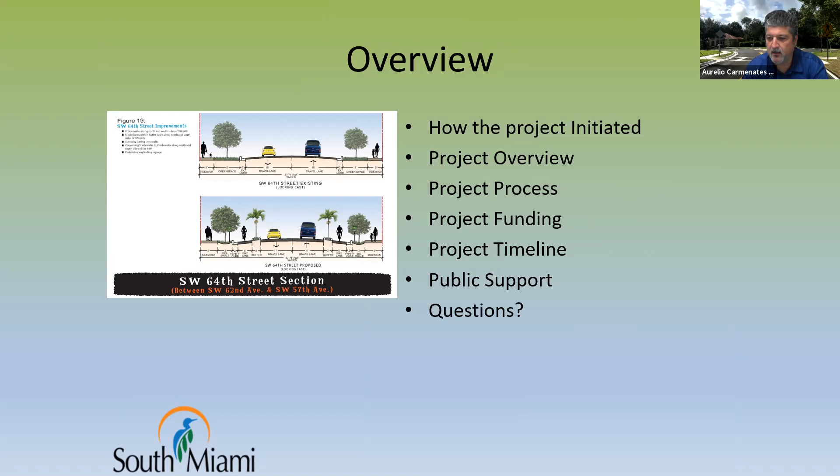To give you an overview, I'm going to go over how the project got initiated, the project overview, the process, the funding, the project timeline, the public support, and then at the end I'll take any questions.

Initially, the City of South Miami decided to enhance the existing transportation system and mobility choices available to residents, workers, and visitors to the city.

In 2012, the City Commission approved funding from PTP to create the South Miami Intermodal Transportation Plan. In 2013, the City of South Miami was awarded a grant from the MPO. And in January 2015, the City of South Miami completed the South Miami Intermodal Transportation Plan.

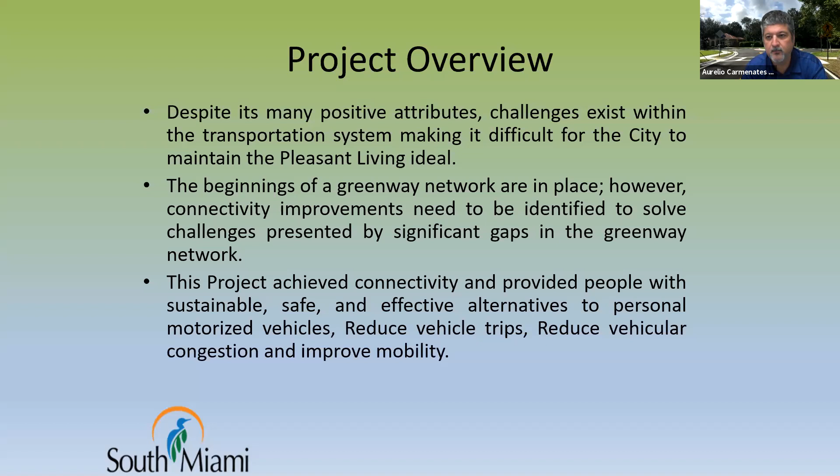In an effort to enhance the existing transportation system, despite its many positive attributes, challenges existed that made it difficult for the city to maintain the pleasant living ideal. So the city embarked on the beginning of a Greenway network where connectivity improvements needed to be identified to solve challenges presented by significant gaps in the Greenway network. The project achieved connectivity and provided people with a sustainable, safe, and effective alternative to personal motorized vehicles. It reduced vehicle trips, reduced vehicle congestion, and improved mobility.

The process required coordination and reviews by Miami-Dade County Department of Transportation and Public Works. The City of South Miami executed a covenant with Miami-Dade County for maintenance of the improvements, and an interlocal agreement was modified to include bike sharrows, which are an integral part and were included as part of the project. Construction of the project was completed on February 17th, 2021.

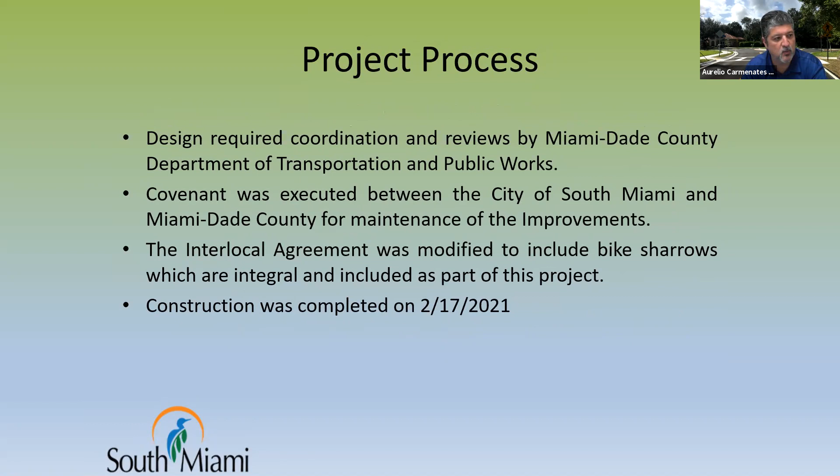As I mentioned before, the City Commission approved in 2012 and received PTP funds for the South Miami Intermodal Transportation Plan, which then started and was completed in 2015. The city spent $178,000 for design and to develop construction drawings based on the findings of the South Miami Intermodal Transportation Plan. The city received funding participation in the amount of $60,000 from Miami-Dade County Public Housing Community Development Block Grant for the design.

The city received $294,916 from the Miami-Dade County Public Housing Community Development Block Grant for construction. In addition, the City of South Miami received and spent from the People's Transportation Tax funding the amount of $103,541.

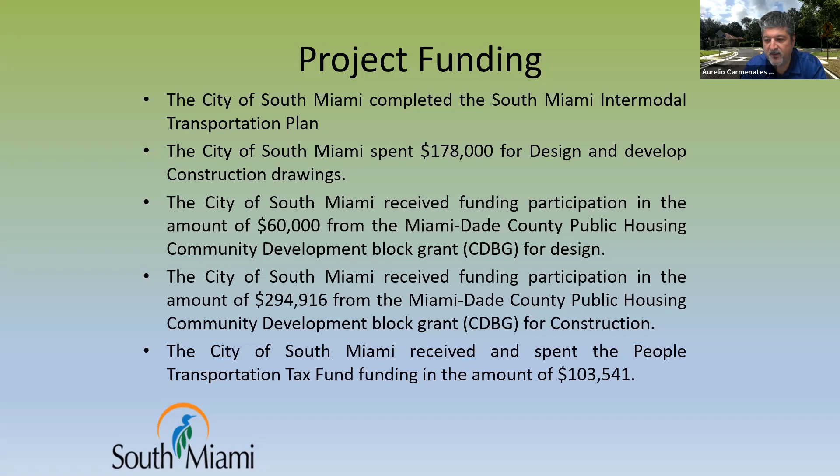The project timeline started on May 17, 2017. The design and permitting lasted all the way up to April 29, 2020, when final construction drawings were developed. The construction bid package was prepared in May, and the project was advertised in June of 2020. The construction was awarded in August 2020, and construction finalized on February 17, 2021.

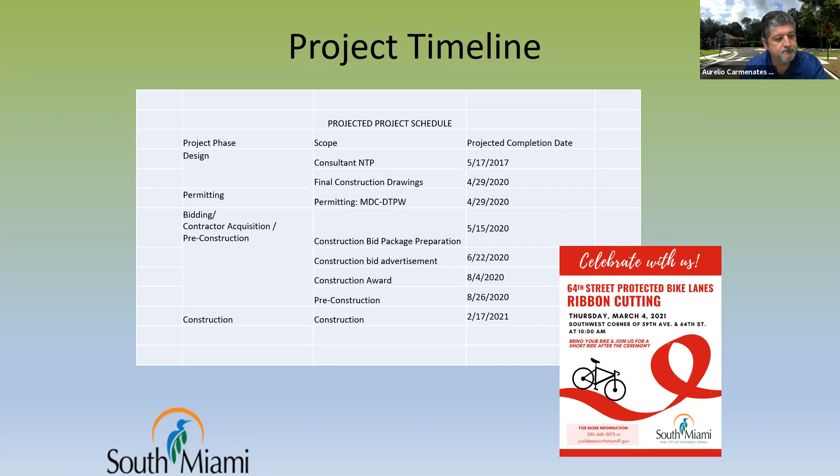Next slide. I included the schedule of values for the project in the amount of $398,457 for the work that was completed, which included the new dedicated bike lane. There were concrete curbs that were added, and all the pavement markings for the dedicated bike lane.

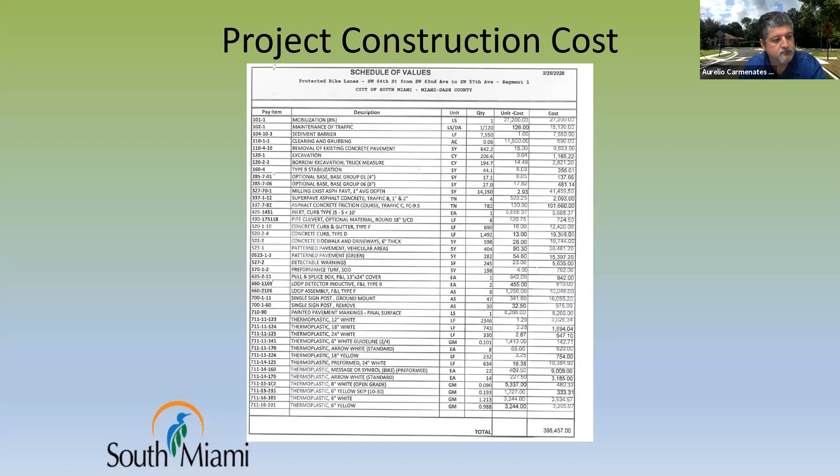The next slide, which I think is pretty much the end of the presentation, and if there are any questions, I'll be happy to answer them.

Hello, Eric Tolberg, sole member here. Did Kevin Wolford pass on to you my email with some of my comments? I did not see that email. I do not believe I passed that on, Eric. Oh, okay, fine. Well, I'll just kind of read from it.

I would like you to have... I've got a graphic that shows why the bike lanes are great, but they need to be extended.

First, I see that you did not put protected bike lanes from 59th Court to 60th Avenue. Was there just not enough right of way in that area? That's correct.

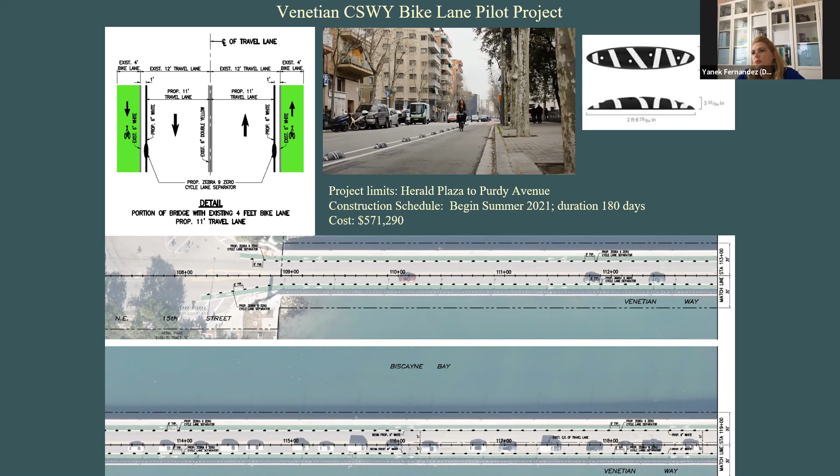Okay, this is just another view of the Venetian, but basically it's the same thing. On the bridges where you have the 12-foot lanes, they're going to be reduced to 11 feet, and a 6-inch white line is going to be added. On top of that, you're going to have the zebras.

If the project is a very simple project in terms that you don't have any reconstruction, you don't have any drainage, it's very simply just sign and pavement marking and the installation of these features. If you have any questions, I think Eric, you had some that you had sent to us. Do you want to bring them up now?

Hello. Yes, I was just concerned that they might have a cyclist fall and therefore be a danger. Is there any history of these being put in, and have they had any problems with that, of a cyclist hitting them and falling over?

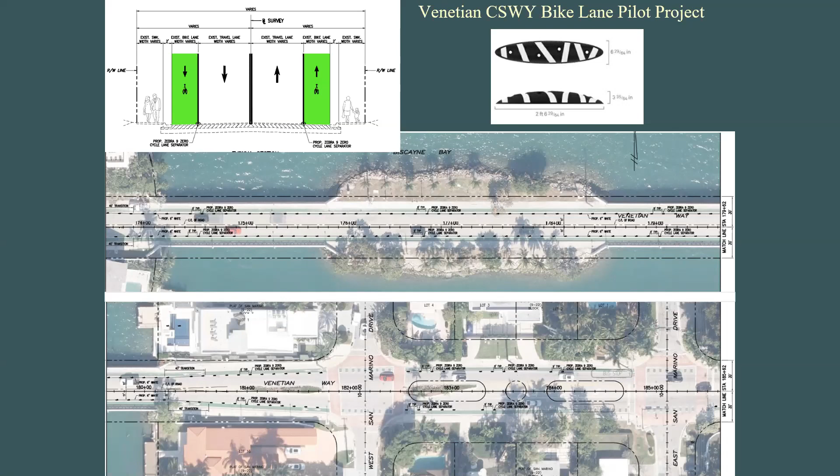This is Eric. I have a suggestion. When this project is complete, I think you should have a meeting with motorists, cyclists, and runners, and try to get everybody there and really stress how you have to be courteous of other road users. And in this case, it might be life-saving.

When you roll out the project, it would be great if you could have a meeting where you have the drivers, the runners, and the cyclists all there, and stress that we all have to get along to be safe and look out for other people. But you know that only the people that care are going to be at the meetings. The people that are dangerous aren't going to be there.

This is actually a question for parts. Lynn, are you there? Yes, I'm here. Is this project going to have a public meeting or meeting with the association along Venetian Causeway prior to implementation? I thought we had a meeting last time with the bicycle community and the commissioner. That was our meeting. I don't think we are proposing any other meetings.

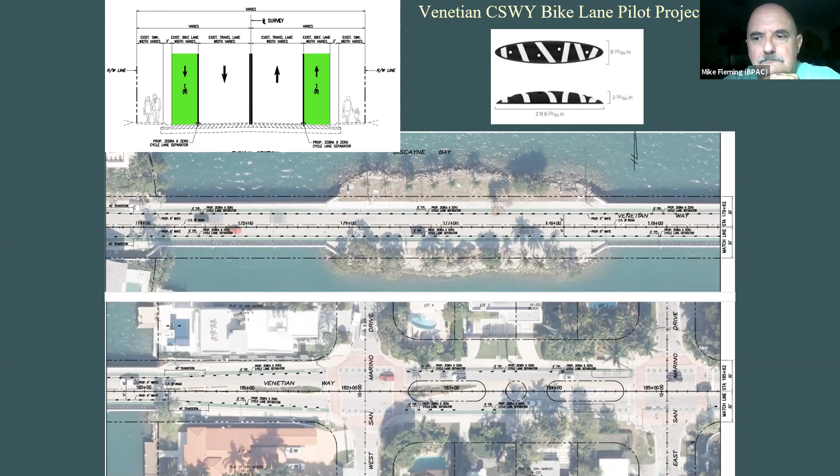This application, we were not able to place them diagonally because there is no space. If you place them diagonally, you'd be taking additional space either from the vehicle lane or the bike lane. So in an extremely constrained location such as this one, I think this is the best approach. When I've talked to central office and also about Meridian Avenue, the ones they installed at the entrance of the bike facilities, where they start, they put a tubular marker to add that vertical element, just one tubular marker.

Might be something to consider, Yannick, just at the entrance when it begins, to add a vertical element, bringing awareness to the vehicles getting onto the facility to alert them that hey, there's a separated bike facility.

That's something to consider. I know that on the west side they begin at a buffer space, so it's not that close to the vehicle lane. You do have a buffer space, but that's something that can be considered. And it's pretty easy to implement too, with about the same footprint. The tubular markers have about a 7-inch base, so it's not much different than the 6.5.

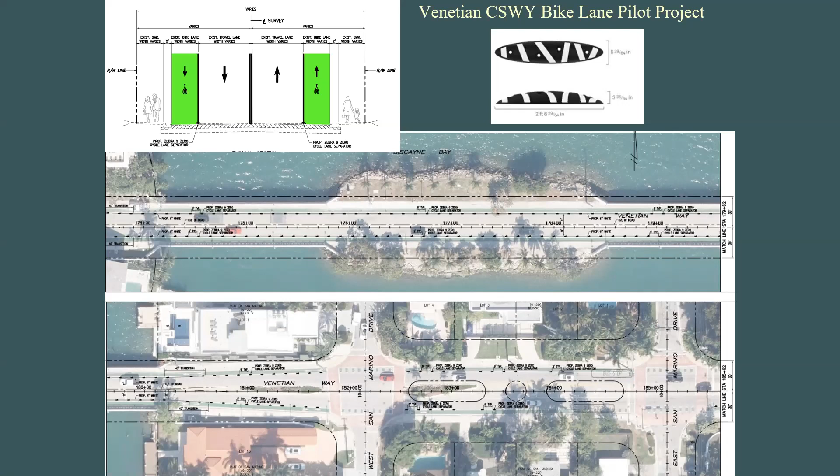Okay, I'll look into that. If no further questions, then Kevin, can you please move to the next slide? Thank you.

This is another project that began as a pilot project. It was implemented by the county at Northeast 2nd Street and First Avenue. This is a sample of a Scramble Crosswalk, at the intersection one block south of Miami-Dade College. The project was completed last year in December 2020, and the construction cost was pretty small considering the typical cost for an intersection roadway project. This is because we utilized existing equipment and just added additional features needed for the implementation of a Scramble Crosswalk. Basically, what was added was the diagonal pedestrian signals.

Let me backtrack for a second. Scramble crosswalks are basically crosswalks where you have an exclusive pedestrian phase for pedestrians. In other words, you stop all traffic so that pedestrians can cross the intersection. But in addition, they can cross either diagonally or perpendicular. One further restriction is that you have to restrict right turning movements. In other words, no turn on red needs to be implemented, so there is no confusion with a vehicle making a right turn and someone coming diagonally.

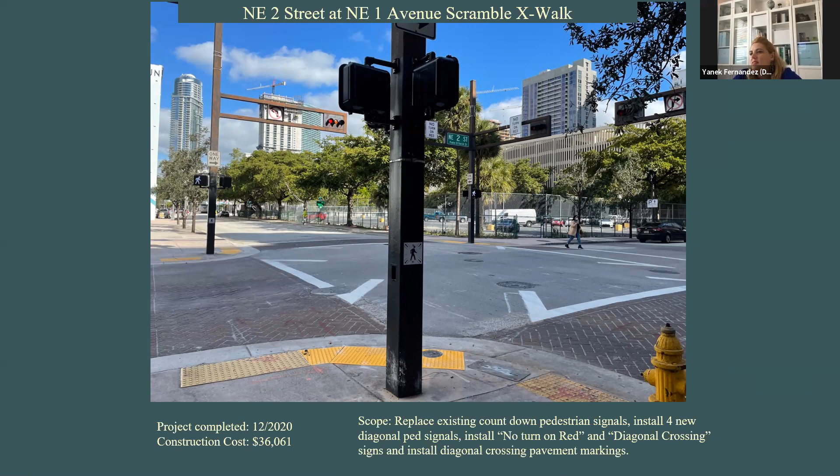The next one, I'm pretty sure Eric is going to be very excited to look at - the Old Cutler trail on 67th Avenue, actually the roundabout. Here, the Old Cutler trail connects to the 136th Street Trail. You can see it on the south side, and the crossing is being done through the south side all the way to the Old Cutler Trail.

Go ahead, Mike. The bike trail, I see the Old Cutler Trail. That's good, now I see the trail on the opposite side. That's very important, because the bike trail swaps sides at the very next intersection - it goes from being on the right to being on the left.

So is this indicating there's a sidewalk or trail on the other side of the road too? It doesn't look like it - what you have on the north side is a regular sidewalk. Let me break in here - on the other side, right now, there is just a single 5-foot straight sidewalk.

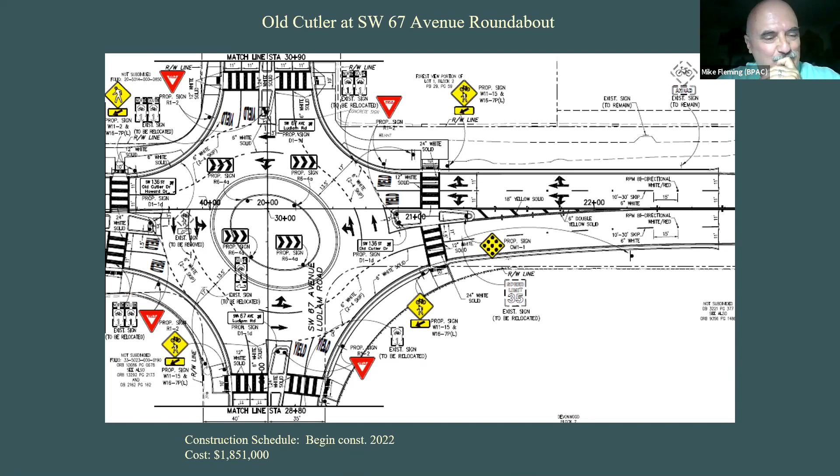This is going to be two traffic circles about 20 yards apart from each other. This is just going to be a nightmare. Actually, it's 450 feet. Is it that far? Wow, it doesn't seem like it. Well, traffic circles do show to slow vehicles down, and 450 feet is a good distance to maintain that slow traffic. So you're right. I'm looking forward to seeing its implementation and hopefully an evaluation of how it's impacting traffic speeds.

One of my suggestions for the other circle was to make it rounder and less elliptical. That might get you the 5 feet that you need on the north side.

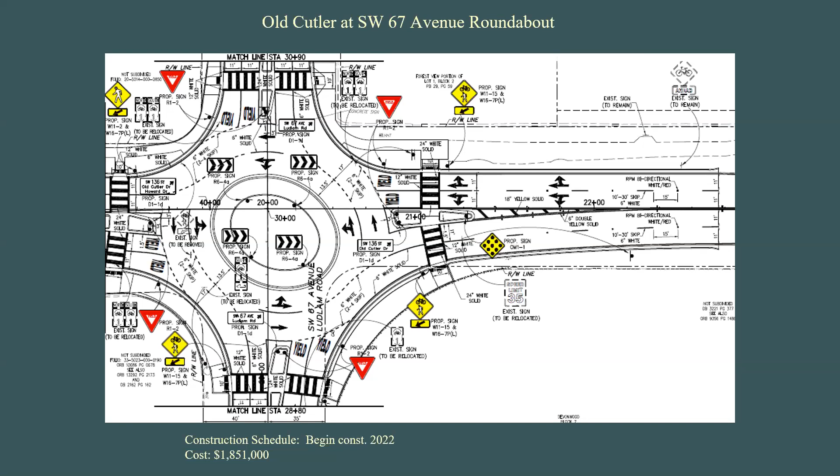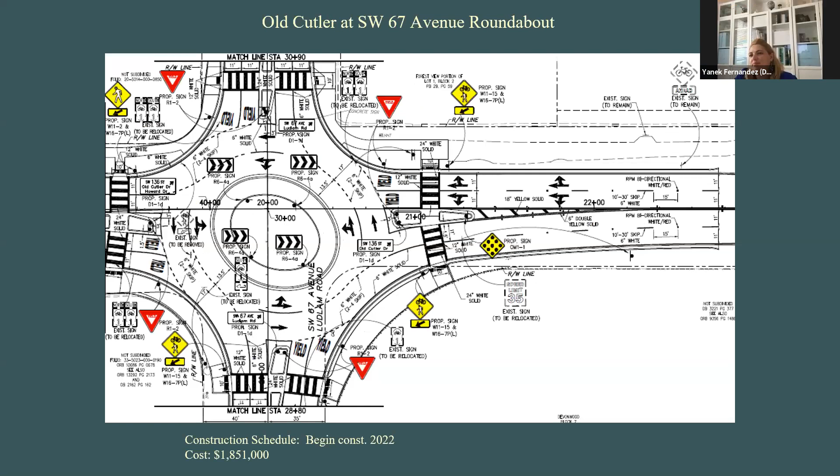Kevin, can you go back for a second? Actually, Lisa's in control of that, but go ahead back, Lisa. Oh, I'm sorry, Lisa. No problem. And Yannick, just so I know, because I'm looking at the clock, how many more slides do you have after this one? Just that one, I'm done here. All right, go back. There we go.

Yes, Eric, that is a good suggestion, but just keep in mind that they have to meet certain deflections for the roundabouts in order to reduce the speed, which is the number one point that they have to address through a roundabout. They cannot allow high speeds through here. So if they're not able to achieve the deflection, then this roundabout doesn't work.

I'll definitely pass on your comments to them and let you know what type of responses I get. Well, there are some things you can do without widening the path at that pinch point. You can first widen the path other places further to the east, but just making a triangle at the corner there so you don't have to make a 90-degree bend would make all the difference. So I'll take a 5-foot sidewalk if I can navigate along it with a bike.

That is one thing that I told them to do: don't do those 90-degree junctions on the sidewalks. Do a chamfer in case someone wanted to turn with a bicycle.

It's a relatively cheap and easy thing to do, and I would hope that the sidewalk plans would follow that. Also, you get a lot of erosion a lot of times in those tight corners, which can create a small drop-off for wheelchair users too, and also cyclists. So it's smart to put a little wedge there. We're not West Point cadets.

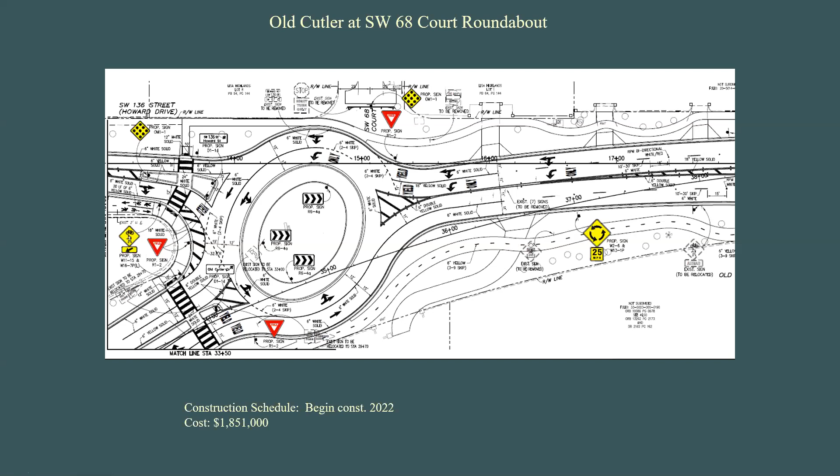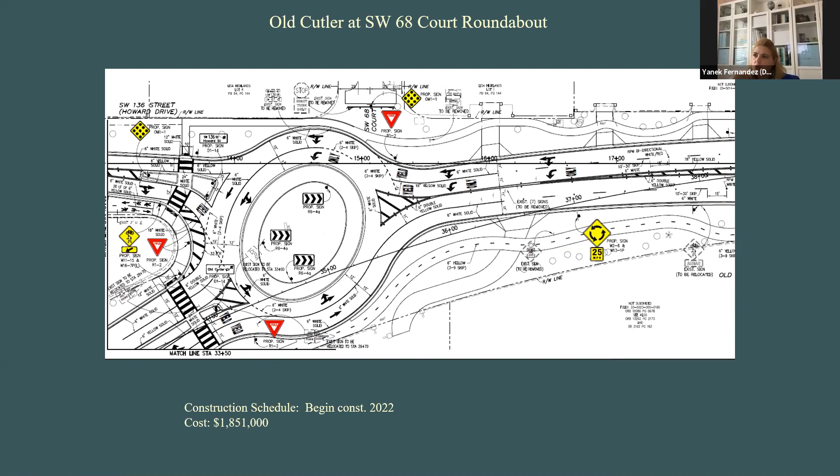Is that trees behind that? Yeah, those should be trees. However, I will send those comments — they have to make sure there's enough visibility to the sidewalk on the path. I will bring that up with them. That's it. Okay, you might want to install a look sign.

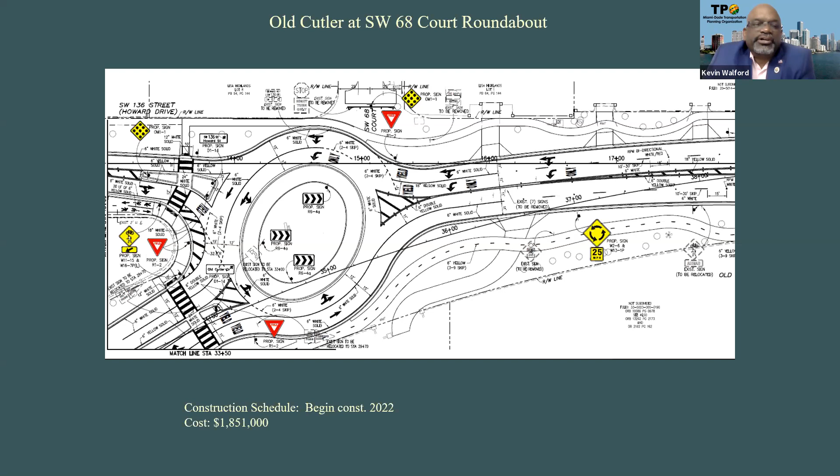Right to the next slide, Lisa. Those are the projects that DTPW has right now. Any questions, feel free to contact me. And that concludes my presentation.

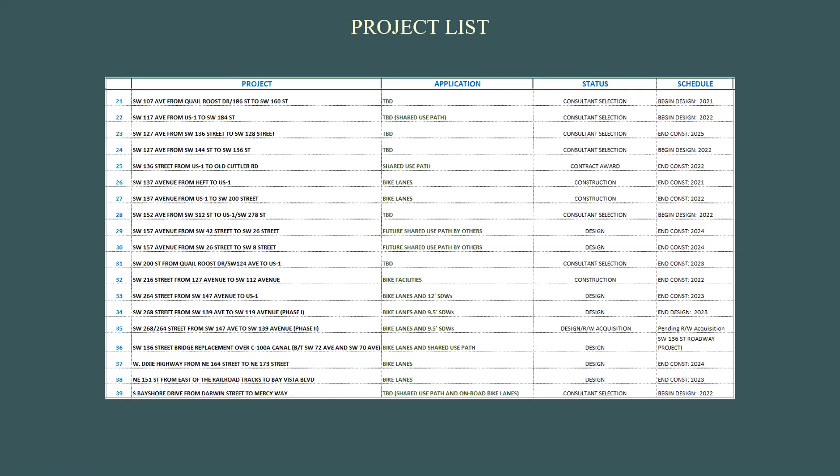Thank you. Okay, I commented on all 39 projects. You have my email, if anything comes up let me know. Will do — I already started forwarding them to the corresponding project managers. As soon as I get a response from them, I'll send them your way.

Yes, I'm particularly interested in when the path on 136th Street is going to start. I had heard it was going to be in March, and then later, now it's supposedly in the summer — but whenever it's going to start, please let me know. Will do. Thank you. All right, thank you very much, Yanek. Tiffany, you're up.

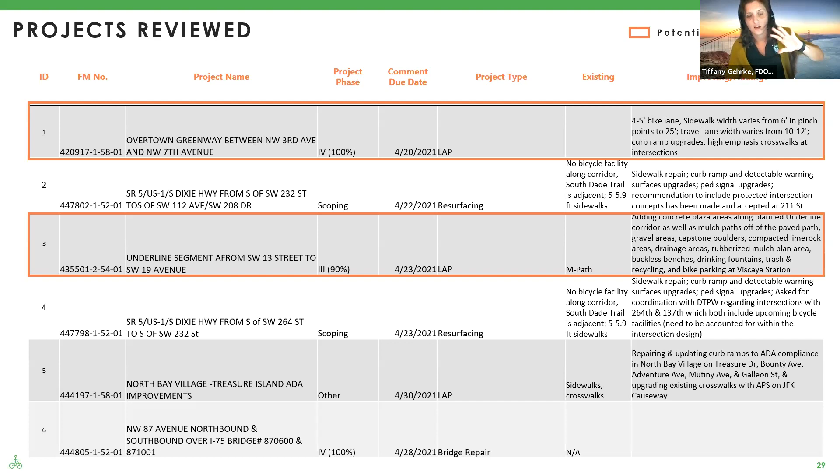So I'm very excited because that's the juxtaposition of where the Black Creek Trail and the protected bike lanes on 211th combine with the South Dade Trail and also the trail that's coming in that PROS is overseeing. So many vital things are happening at 211th. So if we could do a protected intersection, I'm going to continue to fight for that.

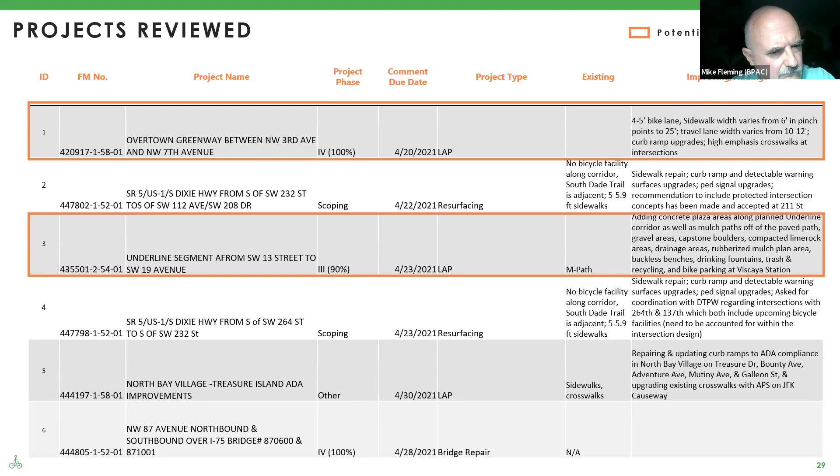And then the underline, the plans for this, just to let everyone know, were for the plaza areas. So this wasn't necessarily the review period that included the amenities, or well, I guess some amenities, but didn't really include the details on the plan of the trail itself. It was more talking about the plaza areas and what type of conditions are going to be there, like concrete plaza, or capstone boulders, gravel areas, compact lime rock, drainage areas. So that's what these plans specifically were for.

And then the next one is another scoping report, from south of Southwest 264th Street to south of Southwest 232nd Street. Again, I know that DTPW has a couple projects coming up with 264th and 137th. So I've asked for them to coordinate with DTPW so that the bike infrastructure going through those intersections is accommodated. Hopefully we'll see some coordination between the project manager of this project and the project manager within DTPW on those projects.

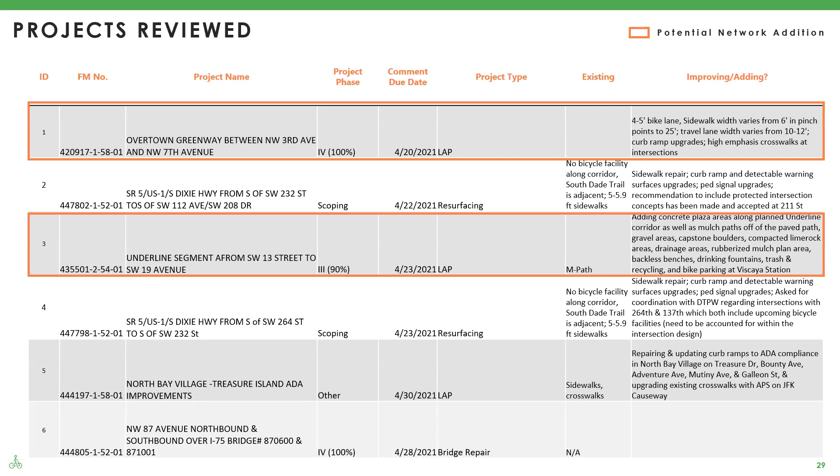And then, 216th Street is under construction now, having bike lanes from 112th Avenue to 127th Avenue, so it'll go through that northern portion. Okay, the other one, item number 2, right? Yes, okay, I'll make sure to add that too. I'll reach out to Calvin and let him know to incorporate that as well.

Okay, and then North Bay Village, this is the Treasure Island ADA improvements. Now, what they're doing here is repairing and updating curb ramps to ADA compliance in North Bay Village on Treasure Drive, Bounty Ave, Adventure Ave, Mutiny Ave, and Galleon Street. And they're upgrading the existing crosswalks with the APS, the accessible pedestrian signal, on JFK Causeway. So a lot of ADA improvements.

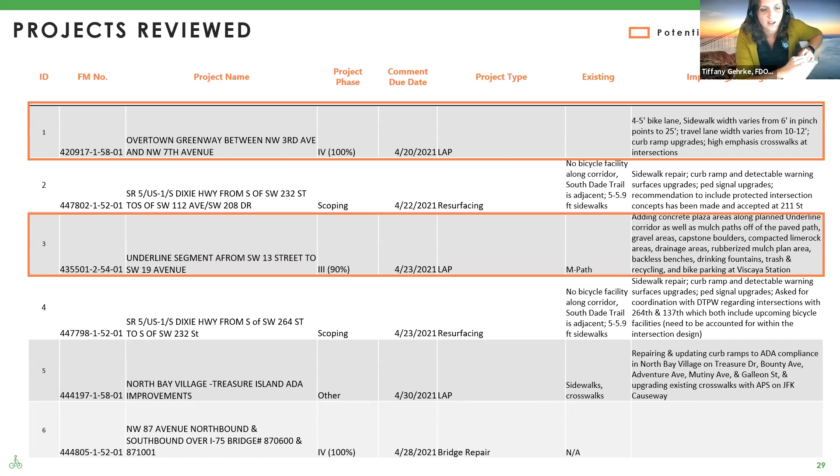Okay, and the last one on this page is the Northwest 87th Avenue northbound and southbound over I-75 bridge, and this is just bridge repair. We'll go to the next slide. So no improvements on our behalf on that, unfortunately.

And then the town of Medley, this is the sidewalk master plan. Now, no details were provided at this point because this is just the request for qualifications review. We just make sure that they're following our process when they're requesting for qualifications.

So North Bay Village, this is the Baywalk Plaza area. I'll show you images in a little bit.

And then the next one is the city of Miami, the Miami River Greenway, Curtis Park East. It's going to have 10-foot concrete sidewalks on the south side of Northwest North River Drive, connecting to the park to both the east and the west. It's also going to have 5 to 7.5 foot sidewalks north of Northwest North River Drive and 13-foot sidewalks on the west side of Northwest 24th Ave, and 10-foot minimum sidewalks east of Curtis Park and west of Miami River. I'll show you that in the images later, I know I've got an image coming on.

And then the next one is just a resurfacing of the ramps here, which does not impact bike or pedestrian infrastructure facilities. And this one is that same bridge, the Tamiami project that all of you are aware of, presented multiple times, on that wetland restoration project. And then this one is State Road 934.

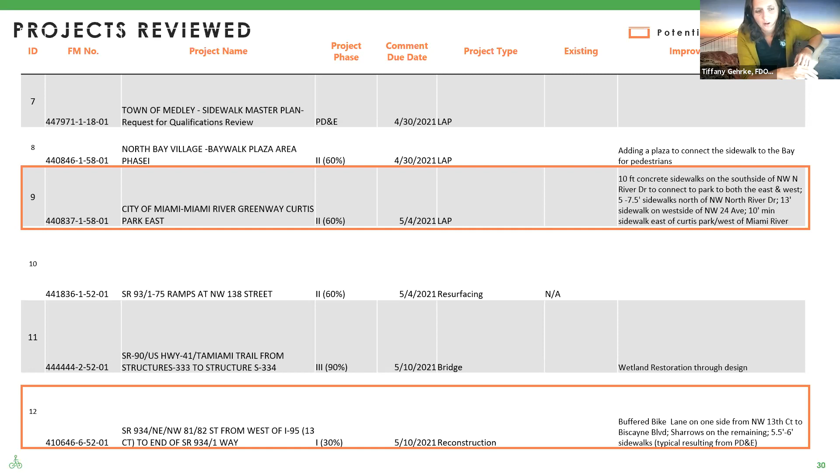This project went through PD&E, so we can go to the next slide since the other piece did go through a project development and environmental process with a lot of public engagement. These were the agreed upon typical sections, the preferred alternative for this corridor, for both number 12 and number 13. What you're seeing here is the 5.5 foot to 10 foot side.

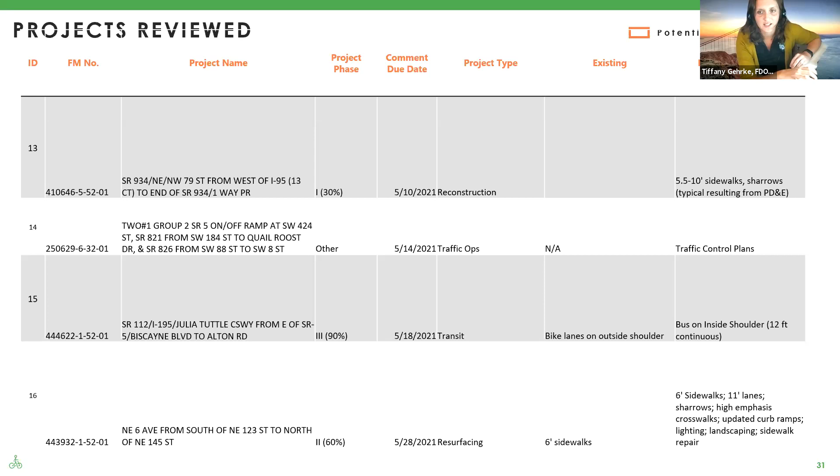Uh-oh, I think Tiffany just froze up. Can you hear me? Yeah, you froze up. Okay, at least... oh wait a second. Yeah, your camera's frozen, okay, but you're talking so keep going. Okay, so I'll just keep talking, I guess.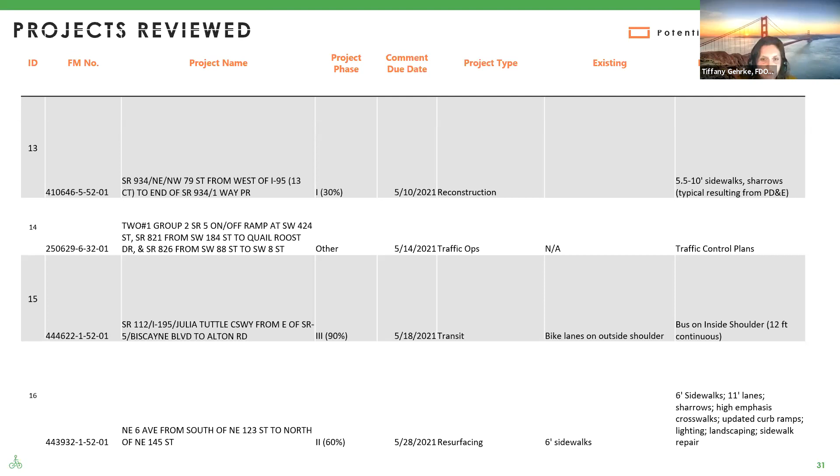Number 12 and number 13 resulted from the project development and environmental process. Traffic Ops has a project doing traffic control plans, supplementing another project. These were just traffic control plans that came through the office for number 14.

Number 15 is the bus on shoulder project, that's on Julia Tuttle, which we've looked at quite a few times. This will eliminate the bike lanes on the outside shoulder. In the next couple of years, the first part will eliminate the bike lanes on the outside shoulder and move the bus to the inside shoulder. It will then free up the outside shoulders again, but we'll have to reapply to use that for bike facilities again, so that's up in the air as to whether we can get that done.

Number 16 is Northeast 6th Avenue from south of Northeast 123rd Street to north of Northeast 145th Street. This will have 6-foot sidewalks, 11-foot lanes, sharrows, high emphasis crosswalks, updated curb ramps, lighting, landscaping, and sidewalk repair. This is a resurfacing project, what we call a triple R project, intended to maintain pavement conditions.

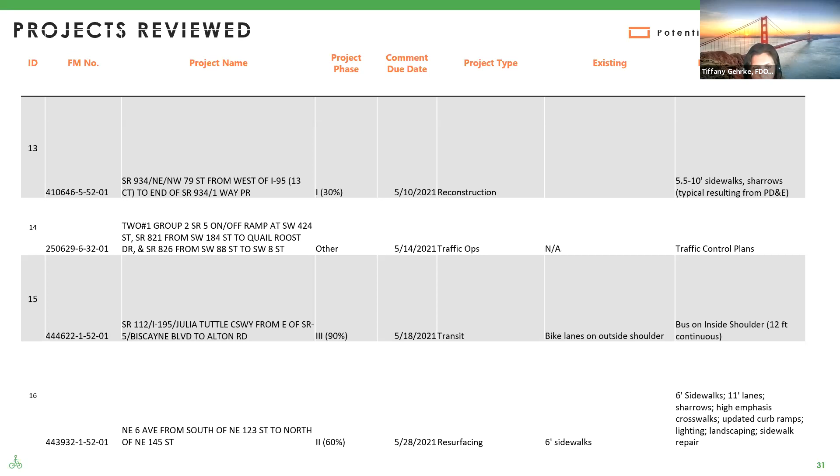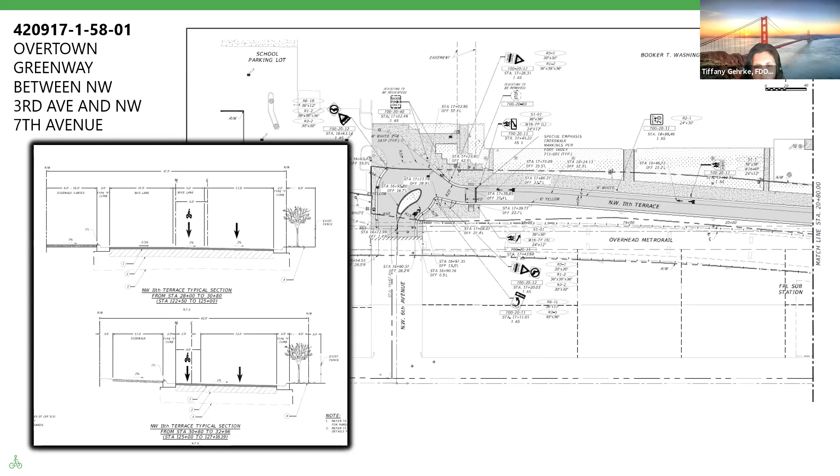One thing that's critical is whenever you have a water fountain, you've got to have a bike rack or something to lean your bikes against. I've been pushing that with Irene - any time we have spaces for gathering, if you have seating, I've been pushing this, but ultimately it's not my decision. I have made that comment; I actually attended a meeting where I made that comment multiple times, that they need bike racks to accommodate the people attracted to those spaces.

So I will continue to make that comment, but ultimately it's not my decision for this project. Did you get the 100% drawings? I got them from Mark - they're supposed to be uploading them soon for our review, so hopefully I'll get those soon.

Mark, could you help her out there? Yeah, they're uploaded, they're there. Oh, they are in ERC? Yes, okay good. I thought I saw an email come through recently saying they should be up soon, but I wasn't able to check. I will look.

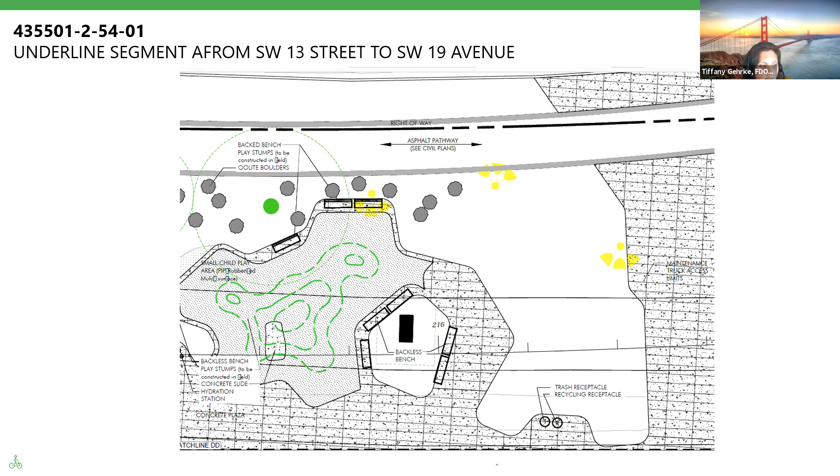Yes, it's not only wheelchairs, but also personal mobility scooters, strollers, bikes for babies, bicycles—there's all kinds of people that go on wheels. So it's not just ADA, it's for everybody else as well. I always tell people that if we're making ADA improvements, we're making improvements for a lot more people than just ADA.

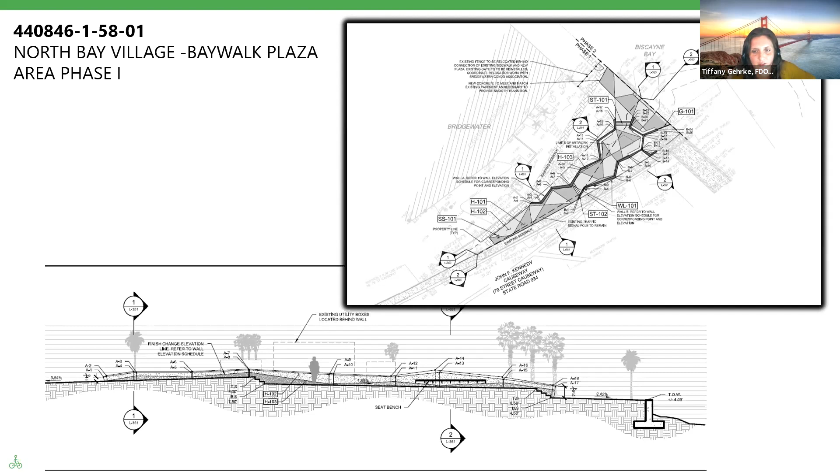Wide enough for there to be a ramp next to the stairs? I'm going to look at the comments a consultant of mine made on behalf of this project. He usually makes about 100 comments for some of these projects, so I kind of feel bad, but he really goes in detail. I'll look over his recommendations to accommodate wheelchairs, and if he for some reason didn't address it, I'll make sure to have a meeting with them separately or send an email.

And this is another City of Miami project. If only Colin was here. Or Brett. Oh, that's true, Brett—this is his baby. He probably would be able to tell you everything about it.

All right, next slide. Are there bike lanes that tie into it? I believe so, but I'll have to confirm that—I can't remember right off the top of my head. It's been a week and a half since I made this presentation, so I'll have to look back and recall if bike lanes were part of this project. Typically, the Miami River Greenway does not use bike lanes; they're pedestrian paths primarily, and I don't think there are any bike lanes in the area. I believe there was one segment that did include, or maybe it was in an application, bike lanes as well as the trail itself, so I'll have to confirm that marked bike facilities were not included within the limits of this project.

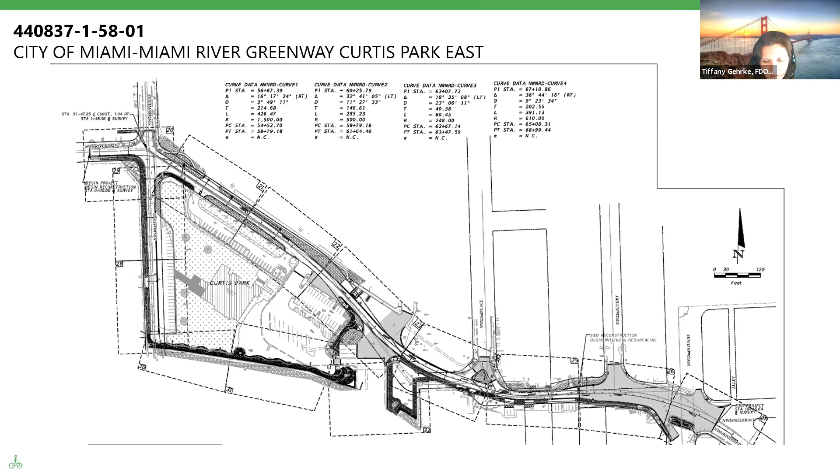That's the intention of the Miami River Greenway, to connect all the way from downtown up north along Okeechobee. Looking into the future image on the screen, there's a gap, or it looks like the east half is not connecting to the west half. I think the image portrays that, but I believe it's supposed to connect. I'll send the plans and confirm that, but I'm thinking maybe it's just the picture quality here. We'll go to the next slide and I'll confirm.

I pointed out that a one-way bicycle facility is not very useful unless there is another one on another road, and there isn't. In this case, I would prefer that space for the bike lane be put into the sidewalks and make a slower but safer bicycle pedestrian facility.

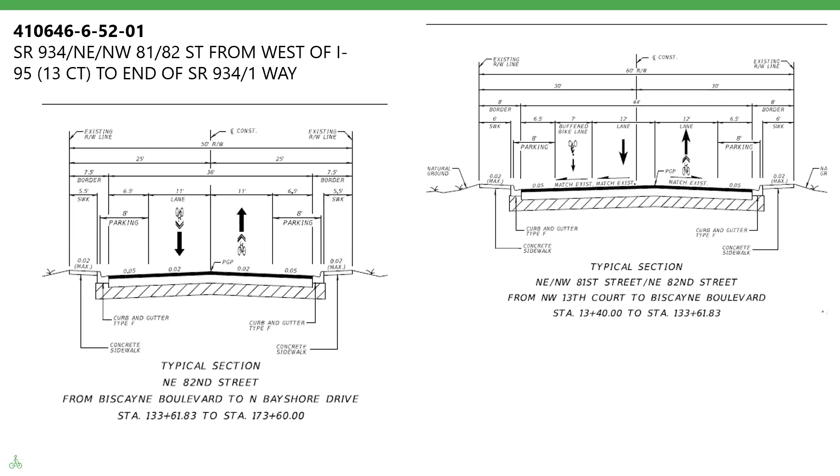I'll have to reach out, but this very typical may have been the result of the process, which means we don't have much flexibility. I'll reach out to the project manager to confirm that. I hear what you're saying, and I can't disagree.

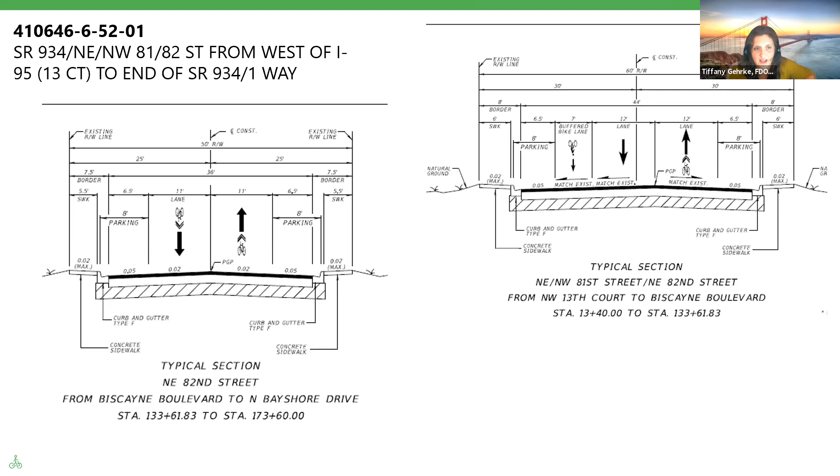Next slide. This is 79th, which is right next to 81st, and this is what's being provided there, again after the PD&E process took place.

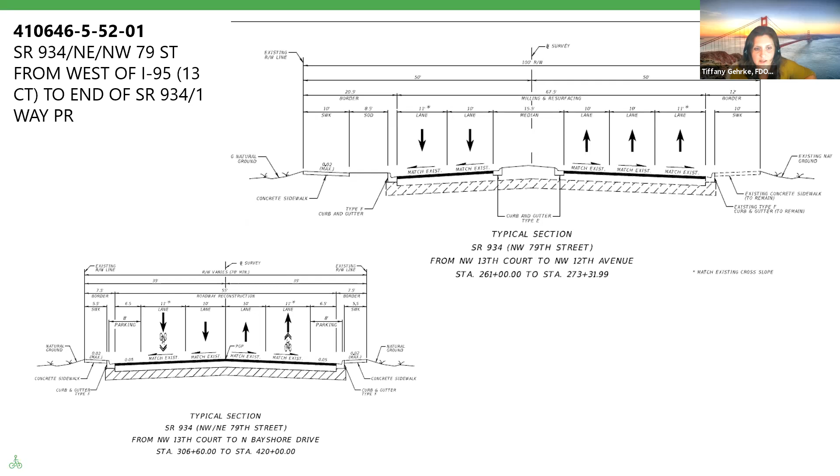I believe that's the last slide, except for the ongoing bike ped efforts. I encourage you, I'll send it to Kevin again. We have made some updates based on my review. I've been really in-depth reviewing corridor by corridor in a lot of the segments, especially with respect to the trails and their alignment, just looking at the Google Earth map of what's existing and what's potentially an opportunity. So there have been some alterations, just minor, to the bike network plan that you may have seen previously. That same link we provided previously still works, so feel free to use it.

And soon, very soon, I expect there's going to be an FDOT mobility, non-motorized mobility webpage that will show the ongoing planning efforts being taken place by my office with respect to bike and ped. It will also have a link to the bike network plan, where you can pull it up and make comments actively, and let us know if there's an alignment you disagree with, or if there's a facility that's actually there that isn't marked, or one that's upcoming that isn't marked as such. You can do that now with the link we provided previously, and I'll provide it again. Feel free to do that, but soon we'll have it on a web page that anybody will be able to access, not just the BPAC members.

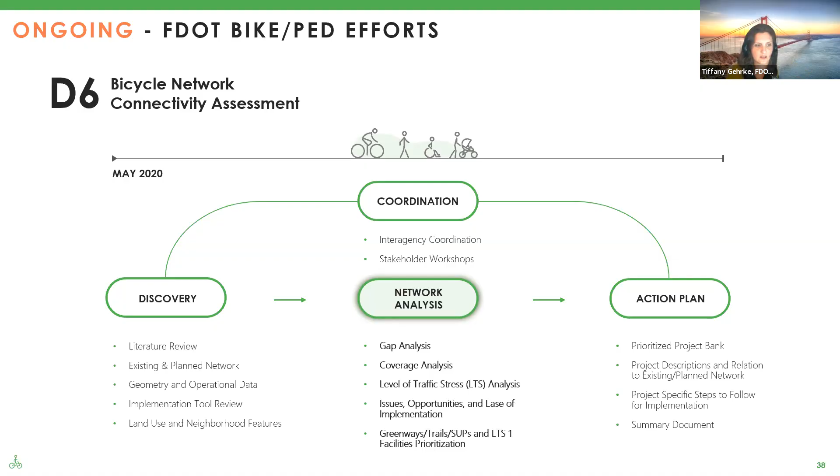Two things. First, is there a deadline on us providing comments on the bicycle network? And second, if there's a link, please send it to Mr. Walford, and he'll send it to all of us. Yes, I'll send the link to Kevin. Actually, no, there is no deadline, because this is going to be a living document.

So the only time there's a deadline per se is when we're actually starting to program projects, or when we're looking into public outreach for a corridor. That's when we're going to need deadlines, but this is an ongoing live bike network plan. So as you experience more conditions throughout the county, you can let us know, hey, I'm seeing a lot of potential use in this section, we should probably accommodate here. I'm definitely willing to take that type of comment and make sure it's reflected in the plan. This will be a forum as well as an information resource.

Yeah, it'll be a piece where people can actually say, this is a vital connection, this is a point that we should be connecting to. Sounds cool. So I think we've discussed it before. Is there any discussion or plan to connect the end of the Old Cutler bike path with the Black Creek Trail, that little missing section by the bridge?